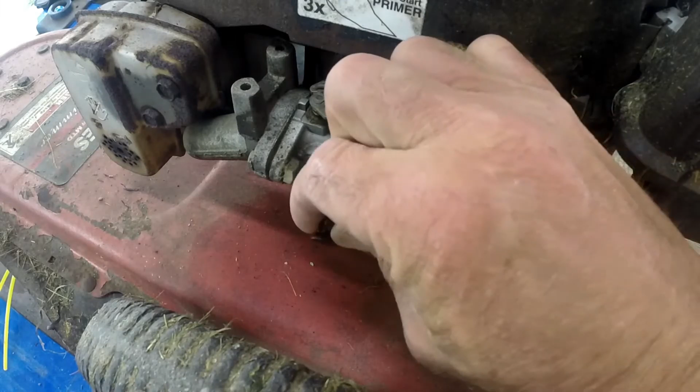In December 2008, the final Tecumseh engine rolled off the assembly line in New Holstein, Wisconsin, silently ending a 50-year reign over American driveways and winter storms. The factory simply went dark. Just a decade earlier, this engine was an unavoidable piece of American hardware.

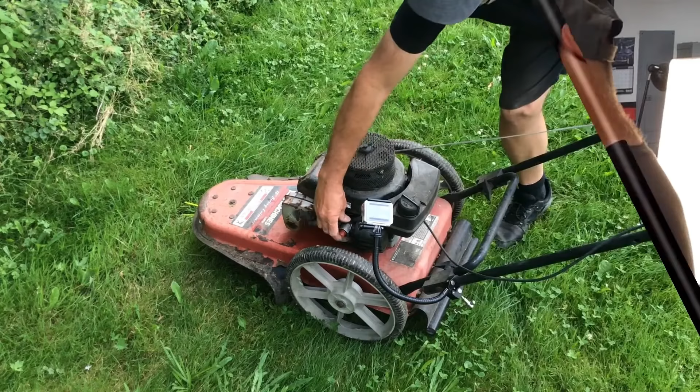Their legendary Snow King line held a near monopoly over winter, powering tens of millions of snowblowers from Toro to Sears Craftsman. The sudden shutdown sent a shockwave through a vast mechanical ecosystem. Local small engine repair shops, the businesses that kept American neighborhoods running, were left staring at empty parts bins. Homeowners suddenly realized their stubborn iron workhorses were now orphans.

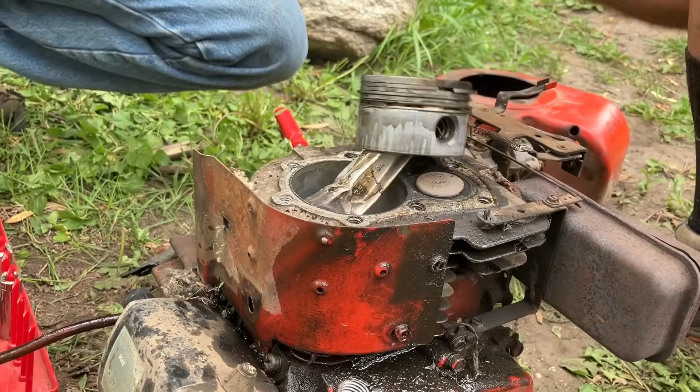The paradox is that the engines themselves had not failed. A Tecumseh flathead could still start on the third pull in sub-zero weather. But the American market no longer rewarded heavy, loud, repairable durability if it could not pass strict emissions rules or compete with cheap overseas clones.

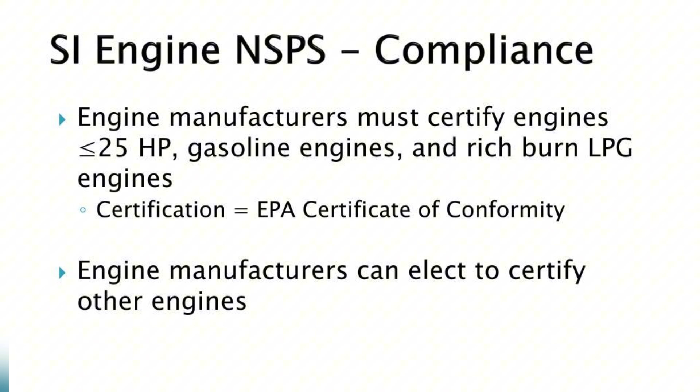But the real story of Tecumseh is not only about a bankrupt factory, it is the story of how the American suburb was built on a cheap, loud, repairable sound, and what happened when that sound became a liability.

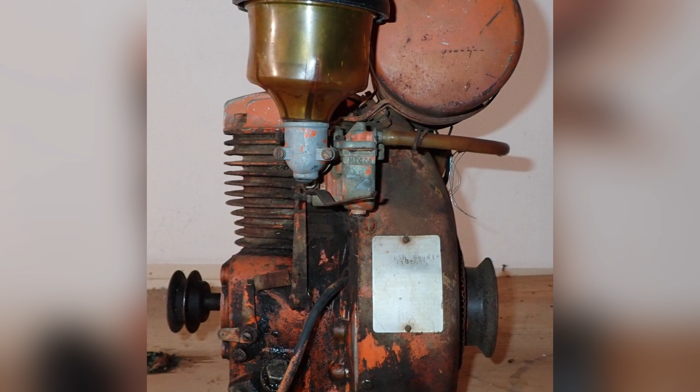When Tecumseh bought Lauson, they did not just buy a factory. They bought a ready-made engineering department, a workforce that understood combustion, and an immediate entry into the market. Tecumseh did not stop there. A year later, in 1957, they acquired Power Products in Grafton, Wisconsin, a company famous for its lightweight two-stroke engines.

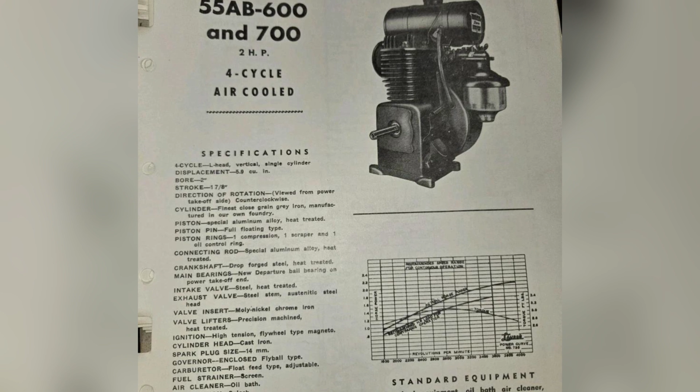An engine that completes a power cycle in 2 piston strokes, often making high power for its size but with emissions and oiling trade-offs. With Lauson providing 4-stroke engine reliability, an engine that completes intake, compression, power, and exhaust strokes across 4 piston movements, and Power Products offering 2-stroke speed, Tecumseh now owned the complete spectrum of light industrial power. These acquisitions were the first major strikes in what would become a 50-year war for the American garage.

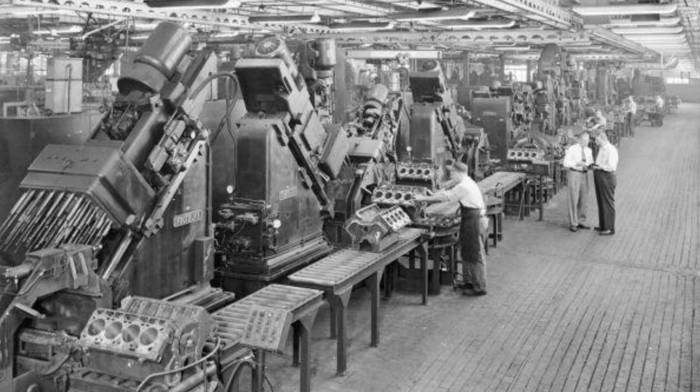Almost immediately, Tecumseh realized that the old way of building a small engine, a compact power unit used in lawnmowers, snowblowers, generators, and pumps, was too expensive for the modern consumer. Historically, farm and utility engines were built with a cast iron block, the main engine structure that holds the cylinders and major internal parts.

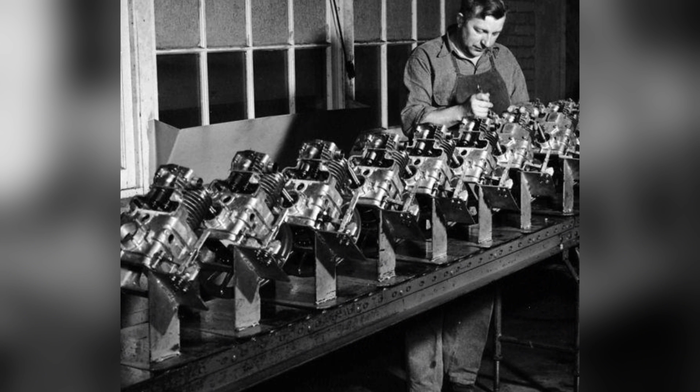Cast iron was incredibly strong and held heat well, but it was heavy, slow to machine, and expensive to ship. If a homeowner was going to buy a lawnmower at a local hardware store and push it across a quarter-acre lot every Saturday morning, the engine could not weigh 40 pounds on its own. It had to be light, and more importantly, it had to be cheap.

Tecumseh accelerated a massive industrial shift toward aluminum. By injecting molten aluminum into precise molds, the New Holstein factory could produce engine blocks at a staggering speed. Aluminum was lighter, dissipated heat faster, and cut the weight of a standard mower engine in half. More importantly, it slashed the manufacturing cost. This was not just an engineering victory, it was a retail breakthrough.

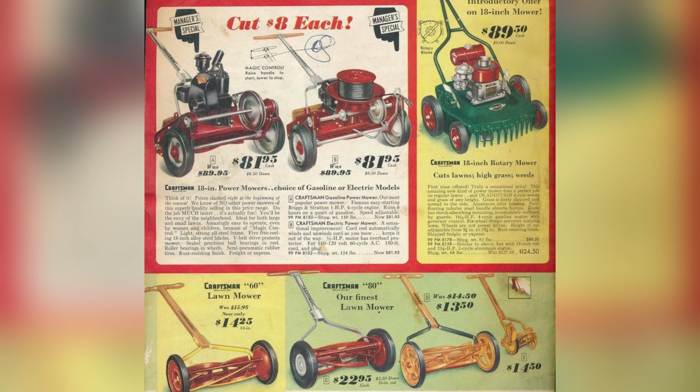In the late 1950s, engines reached Americans through systems. A company could build a great machine, but if it did not fit into the existing distribution network of hardware stores, catalog sales, and farm supply centers, it would fail. Tecumseh needed scale, and they found it in the Sears, Roebuck and Company catalog. By securing massive fleet orders from companies that built yard equipment for Sears, specifically the Craftsman line, Tecumseh guaranteed that their engines would be shipped to nearly every zip code in the country.

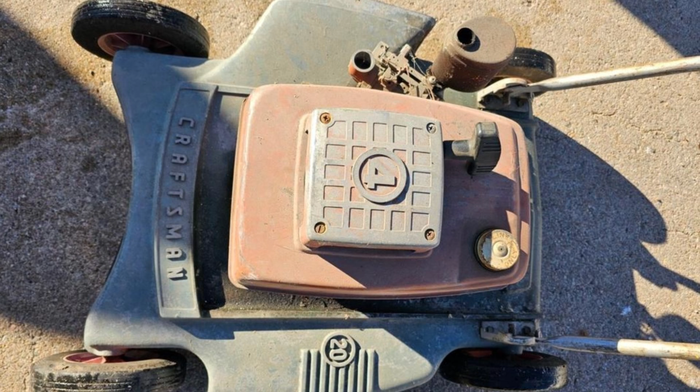A homeowner flipping through a catalog in 1959 did not have to understand the thermal properties of an aluminum block, nor did they care about the displacement, the total volume swept by the pistons inside the cylinders. They just saw a rotary lawnmower that cost less than a week's wages, ready to be picked up at the local Sears Auto Center.

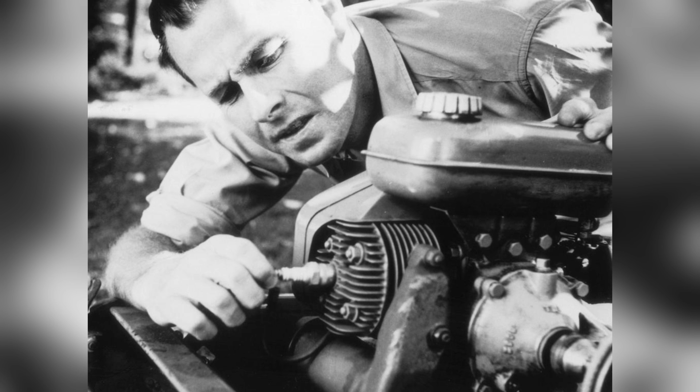The engine had become a household appliance, but unlike a refrigerator that sat silently in a kitchen, a small engine demanded a ritual. It required the smell of spilled gasoline on a driveway, the checking of the oil level, and the physical pull of a starter cord. The New Holstein factory was suddenly producing the mechanical heartbeat of the American weekend.

Tecumseh had the factories, the aluminum casting technology, and the distribution network. They had established a foothold against Briggs & Stratton, turning the small engine market into a two-horse race that would define American yard work for generations. The factory was ready, but to conquer the American yard, Tecumseh needed more than just a running engine. They needed a machine that could survive the absolute neglect of the American homeowner.

By the early 1960s, Tecumseh faced a mechanical problem that could not be solved by mass production alone. A lawnmower engine could not operate like a stationary generator or a heavy tractor. It had to be pushed up steep suburban embankments, tilted over curbs, and shoved under low-hanging branches. Early small engines often relied on gravity-fed fuel systems, meaning if the mower tilted too far, the fuel stopped flowing, and the engine simply died.

To conquer the uneven American yard, Tecumseh aggressively adopted and perfected the use of the diaphragm carburetor. A carburetor is a device that mixes fuel and air before the mixture enters the engine. But instead of relying purely on a float bowl and gravity, a diaphragm carburetor used a flexible rubber membrane that pulsed with the engine's vacuum, actively pumping fuel into the combustion chamber regardless of the engine's operating angle.

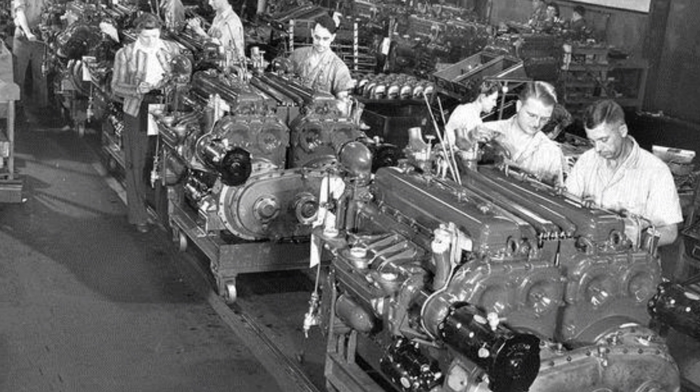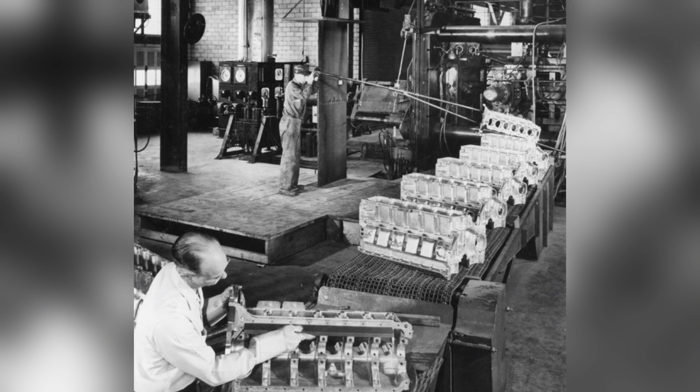This was not just a technical upgrade. In a practical American scene, it meant a homeowner in Pennsylvania could push a spinning lawnmower sideways across a 30-degree ditch without the engine sputtering out. Homeowners were no longer restricted to flat, perfectly manicured lawns. They could clear brush on steep, uneven terrain and maintain properties that previously required expensive professional landscaping equipment. The machine bent to the will of the landscape. Combined with a lightweight aluminum block, Tecumseh engines were now cheap to cast, easy to ship, and incredibly versatile.

Inside the New Holstein plant, the machining lines moved at a relentless pace. Thousands of aluminum blocks were cast, bored, and assembled daily. The scale of production drove the manufacturing cost down to a point where the engine was no longer a luxury item. It was a basic household utility.

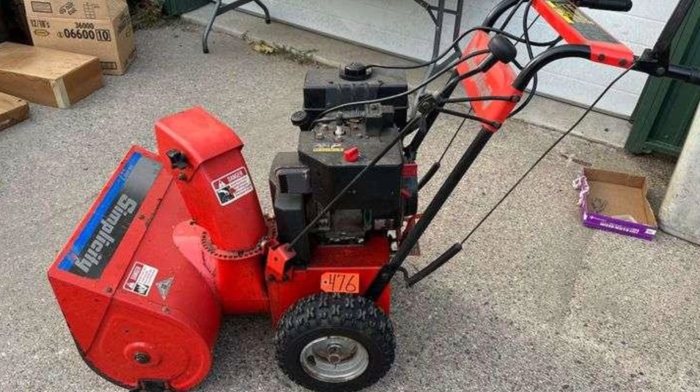But Briggs & Stratton had already saturated the summer grass market. To build an empire that could not be dismantled, Tecumseh had to claim a territory where their rival was vulnerable. They found it in the dead of winter. In 1962, Tecumseh launched a line of engines that would become the undisputed mechanical authority of the American snowbelt, the Snow King.

Building an engine to cut grass on a warm July morning was fundamentally different from building an engine to clear heavy, wet snow in January. Winter is violently hostile to internal combustion. Sub-zero temperatures thicken oil into sludge, shrink metal tolerances, and freeze condensation inside fuel lines.

A snowblower engine had to start when the homeowner was standing in a dark, freezing garage at 5 in the morning, wearing heavy gloves, pulling a frozen recoil cord before leaving for work. The Snow King succeeded because Tecumseh leaned heavily into the flathead design. A flathead is an engine design where the valves sit in the block rather than in the cylinder head.

By modern engineering standards, the flathead was wildly inefficient. The airflow pathway was convoluted, it ran hot, and it burned fuel poorly. But efficiency was not the metric of success in a February blizzard. Reliability was. The flathead design meant there were no delicate overhead push rods to bend or snap when a cold, oil-starved engine was violently forced into high RPMs.

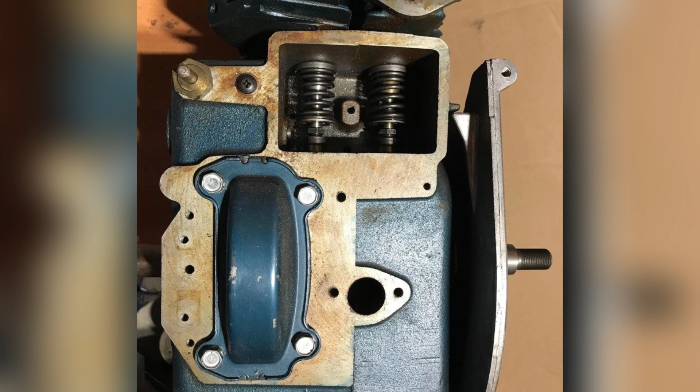It was a blunt, heavy-breathing iron and aluminum brute that could tolerate the absolute worst maintenance habits of the American homeowner. Tecumseh engineers modified the Snow King specifically for the cold. They added metal heater boxes around the carburetor to prevent icing. They redesigned the recoil starter with oversized handles so a user wearing thick winter mittens could firmly grip the pull cord.

They added aggressive rubber priming bulbs that allowed a frustrated homeowner to physically force raw gasoline directly into the intake tract for a cold start. When the engine fired, it barked to life with a harsh, unrefined clatter that echoed off snowbanks. A loud metallic rhythm that became the defining acoustic signature of a Midwestern winter.

By the late 1960s, the Snow King was not just a successful engine family, it was a monopoly. Tecumseh secured massive fleet contracts with the most trusted hardware names in America. If a homeowner went to a Sears retail store and bought a Craftsman snowblower, they were buying a Tecumseh block. If they bought an Ariens snow machine to clear a long Wisconsin driveway, it was powered by a Snow King. Toro, another titan of yard equipment, relied heavily on Tecumseh to power their winter machines.

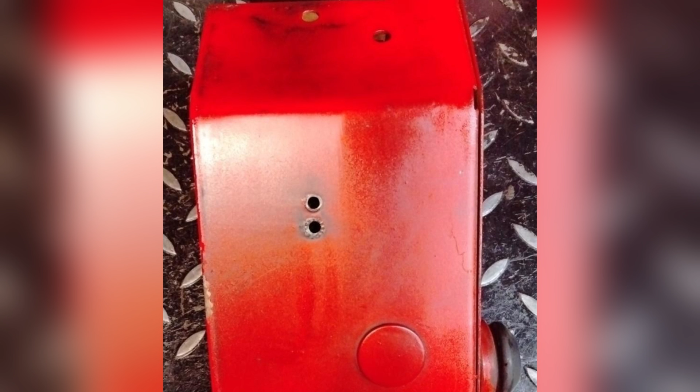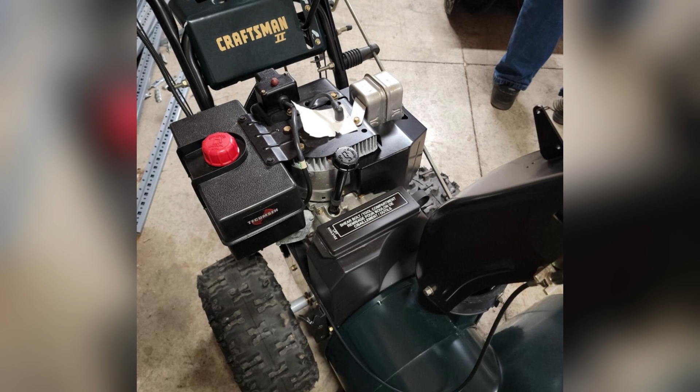This distribution network was the true breakthrough. Tecumseh did not have to sell engines directly to the public. They sold them to Sears, Toro, and Ariens, who then put them in every garage from Maine to the Dakotas. The engine was priced as a commodity. A homeowner did not need a bank loan to buy a 5-horsepower Snow King, horsepower being a measurement of how quickly an engine can do work. They simply bought the machine from a catalog, filled it with cheap gasoline, and expected it to run.

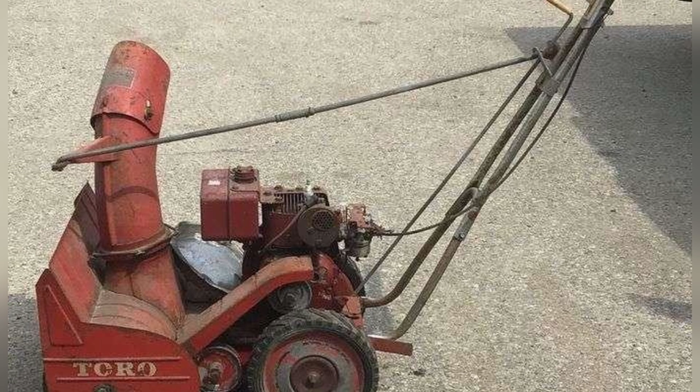But Tecumseh knew that even a cast-iron cylinder sleeve and a forged crankshaft, the rotating shaft that turns piston motion into rotational power, could not survive forever without service. The final pillar of their breakthrough was the establishment of a massive, decentralized service network. Tecumseh flooded the country with heavily detailed, oil-resistant service manuals and cheap replacement parts. They did not require specialized, high-end dealerships for repairs. Instead, they empowered the local small engine repair shop.

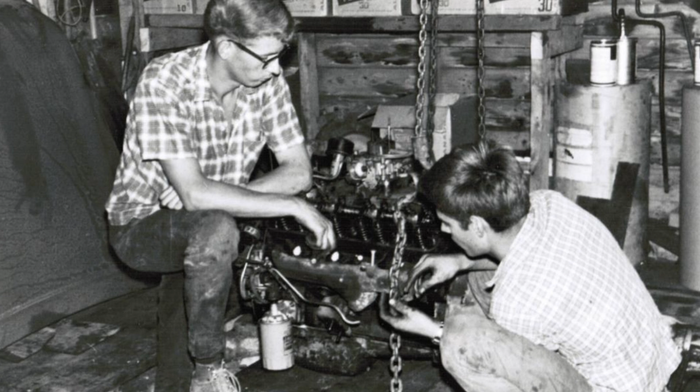In almost every American town, there was a cinder block garage filled with the smell of stale fuel and solvent, run by a mechanic who could rebuild a Tecumseh carburetor with his eyes closed. The parts network meant that an engine did not die when a gasket failed or a jet clogged. It was simply placed on a workbench, taken apart with basic hand tools, and put back into service before the next snowfall.

A homeowner could walk into a local hardware store, buy a $3 carburetor rebuild kit or a replacement spark plug, and fix the machine themselves on a Saturday afternoon. The local parts counter became the lifeline of the American yard. Tecumseh had created an engine that was cheap enough to mass produce, rugged enough to survive winter, and simple enough for a teenager to rebuild.

They had woven their machines into the fabric of suburban life, securing contracts that guaranteed millions of units sold every year. They had built the engine that could survive the cold, but they had not yet realized that they were building the mechanical identity of the American working class. By the 1970s, the Tecumseh Products Engine Division was no longer just a challenger to Briggs & Stratton.

It was an industrial empire running at maximum velocity. The New Holstein plant in Wisconsin had become a sprawling mechanical fortress of foundries, machining lines, and assembly bays. The air inside the factory smelled of hot aluminum, cutting fluid, and industrial exhaust. Thousands of workers stood at assembly lines, dropping forged crankshafts into aluminum blocks, torquing bolts, and bolting on the distinctive metal shrouds that would soon sit in millions of American garages.

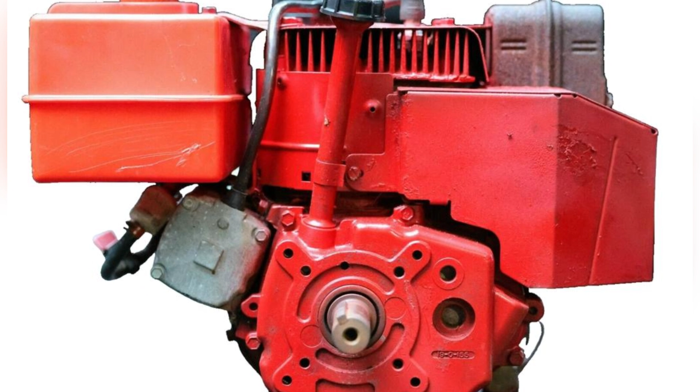Tecumseh had captured the American winter with the Snow King, securing contracts with Toro, Ariens, and Sears Craftsman. But an engine manufacturer could not survive on winter alone. The company needed to own the summer, and they needed to own the rapidly expanding market of suburban recreation. During the late 1960s and 1970s, the American backyard transformed. It was no longer just a place to cut grass. It was a place for go-karts, mini-bikes, and utility vehicles. Tecumseh seized this cultural shift by mass-producing engines that were perfectly suited for cheap recreational speed.

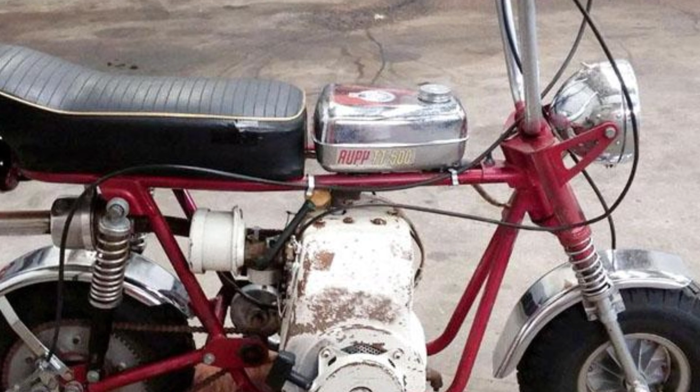The 5-horsepower Tecumseh Flathead became the undisputed mechanical heart of the American mini-bike craze. Companies like Rupp, Fox, and Alexander Reynolds built thousands of small, raw steel frames, but the machine was useless without a power source. The Tecumseh block was cheap, accessible, and easily modified. A teenager with a basic socket set could remove the governor, a mechanical device designed to limit the engine's maximum speed for safety, and suddenly a piece of lawn equipment became a neighborhood race car.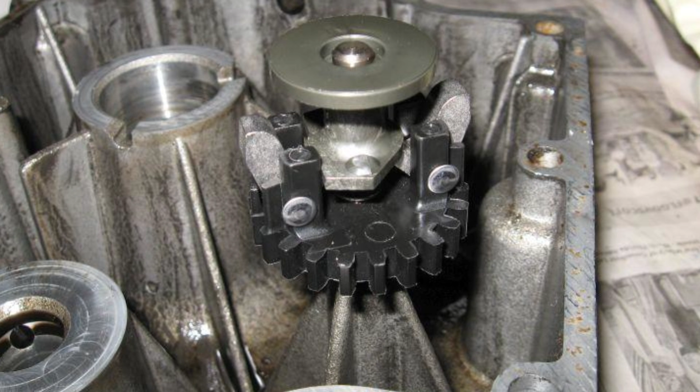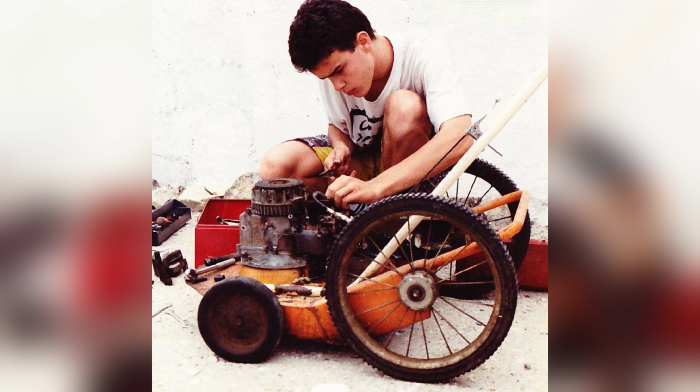This was not just a manufacturing victory, it was the moment Tecumseh trained an entire generation of Americans on how to turn a wrench, diagnose a flooded carburetor, and understand the relationship between fuel, spark, and speed. The reach of the Tecumseh empire in this era was staggering. Through massive fleet orders and catalog distribution, the engine was inescapable. If a homeowner walked into a Montgomery Ward, a J.C. Penney, or a local hardware store to buy a rotary mower, a tiller, a portable generator, or a trash pump, there was a massive statistical probability that the machine was powered by a Tecumseh block.

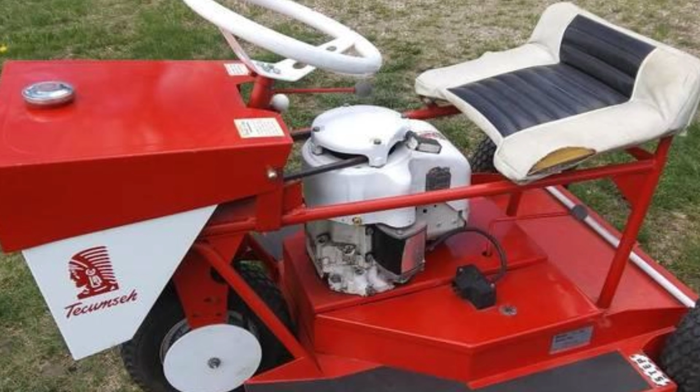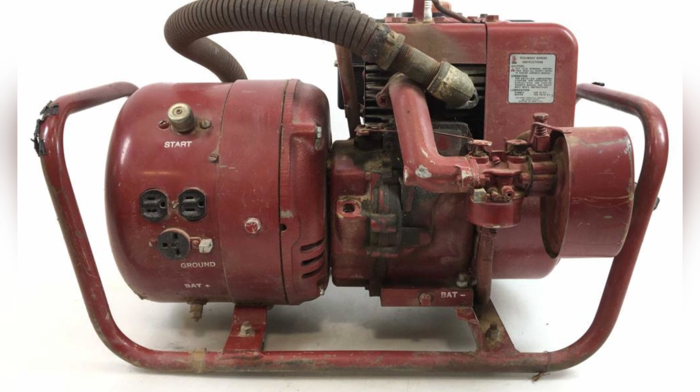They were turning out millions of engines a year, dominating the private label market. Sears did not cast its own engine blocks. They contracted Tecumseh to paint them black, slap a Craftsman decal on the starter shroud, and ship them across the country. The engine had become a utility as common as a light switch, but one that required physical interaction. In an America where a Saturday morning was measured by the smell of cut grass, and a winter storm was fought with iron and a pull cord, power was not a silent battery. It was gasoline, noise, and an engine that you could fix on a garage workbench. Power was a system, and Tecumseh had perfected the system.

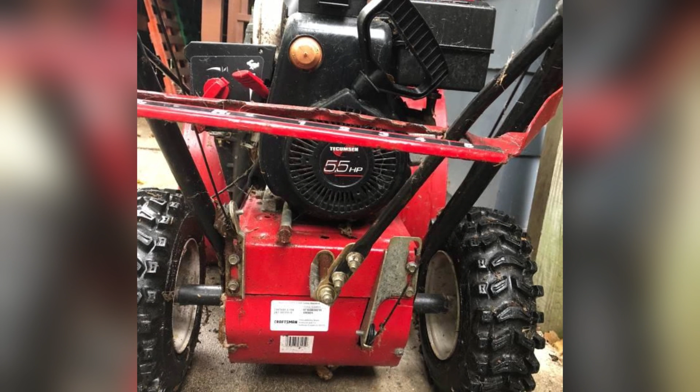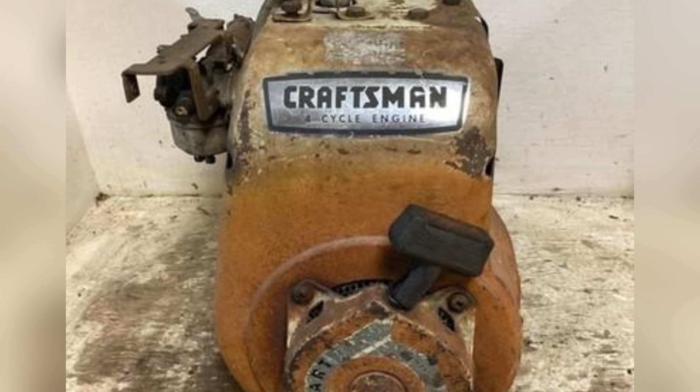By the 1980s, the service network was arguably more valuable than the engines themselves. The local small engine repair shop was a vital institution in the American suburb. These cinder block shops, often located behind hardware stores or tucked away in industrial parks, were filled with thousands of small cardboard boxes printed with the Tecumseh Indian head logo. Because the flathead design was fundamentally simple, a mechanic did not need a computer or a specialized diagnostic tool to keep a Tecumseh running. They needed a feeler gauge to set the ignition points, a wrench to clean the carburetor bowl, and a strong arm to test the pull cord. The engines were loud, they vibrated heavily, and they burned fuel with aggressive inefficiency, but they were deeply, inherently fixable.

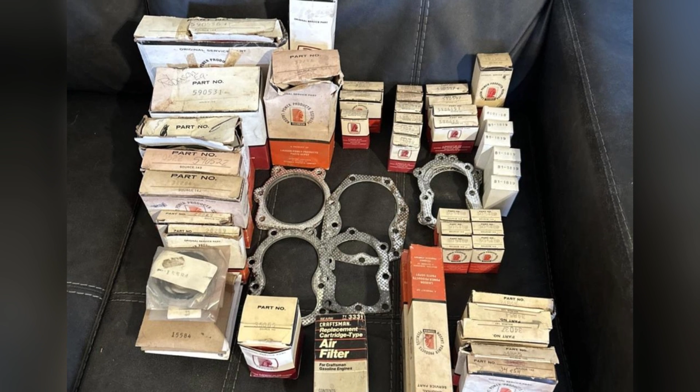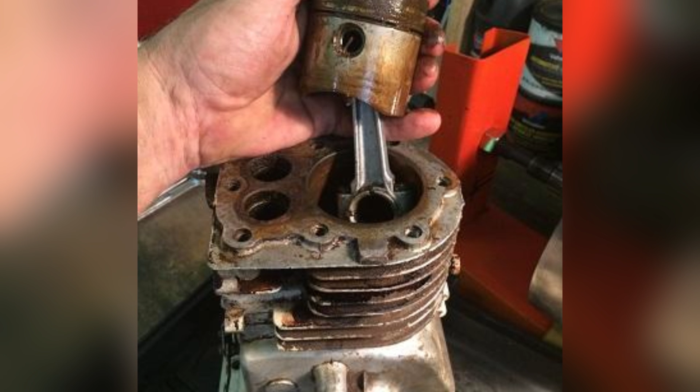This repairability was the foundation of the brand's trust. A homeowner did not throw away a Sears Craftsman snowblower when the engine stopped running. They dragged it to the local shop, paid $30 for a carburetor rebuild and a new spark plug, and kept using the machine for another 10 years. The engine was an investment in iron, supported by a parts catalog that seemed infinite.

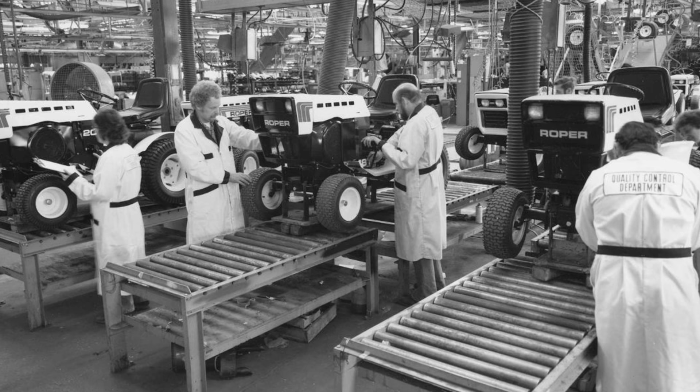By the 1980s and into the early 1990s, the Tecumseh engine division had reached a level of scale that made them a structural pillar of American yard work. They were no longer just supplying Sears and Toro. The American retail landscape was shifting toward massive big-box hardware stores, and the companies supplying those stores, massive metal stamping corporations like MTD and Murray, needed millions of engines to bolt onto their lawnmowers, tillers, and snowblowers. Tecumseh was ready to supply them. The factory lines in Wisconsin were operating at a staggering volume.

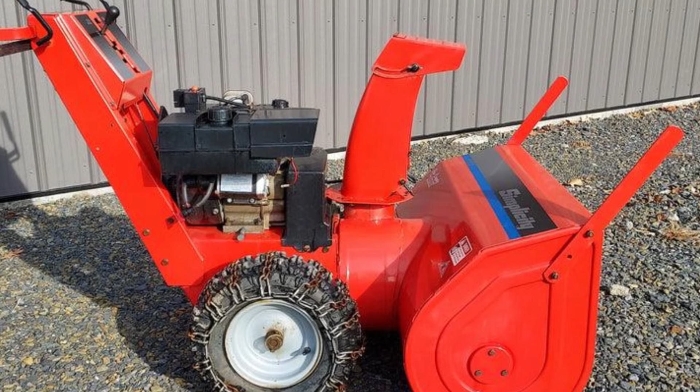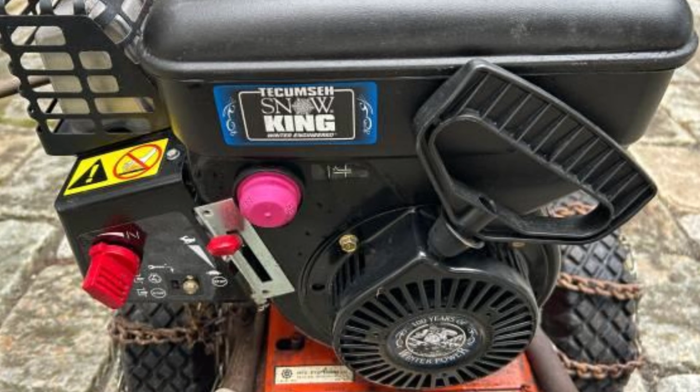The Snow King line in particular had evolved. It was no longer just the basic 3 or 5 horsepower block. As American driveways grew larger and consumers demanded wider, heavier 2-stage snowblowers, machines that used an auger to break the snow and a separate high-speed impeller to throw it, Tecumseh scaled up the displacement. They introduced massive, heavy-breathing flathead engines producing 8, 10, and eventually up to 13 horsepower.

These larger blocks were cast-iron sleeve brutes. They vibrated so violently that they often shook their own muffler bolts loose, but they generated immense torque, twisting force, often felt as the pulling strength of an engine. When a 10-horsepower Snow King hit a wall of frozen, compacted plow wash at the end of a driveway, it did not stall. The governor simply snapped the throttle wide open, the exhaust barked a deep mechanical roar, and the machine chewed through the ice.

This mechanical reliability created a cultural phenomenon. In the aftermath of the massive Midwestern blizzards of the 1980s and 1990s, an entire neighborhood could be mapped by sound. The harsh, unrefined clatter of Tecumseh flatheads echoed down every street. It was the sound of American homeowners reclaiming their driveways, relying on a machine they had bought out of a catalog 10 years earlier, and maintained themselves with a socket set.

The sheer volume of these engines in circulation created an economy of scale that seemed untouchable. The Tecumseh dealer network and independent service shops were supported by an ocean of replacement parts. At local hardware stores, pegboards were lined with blister-pack carburetor rebuild kits, float needles, spark plugs, and replacement primer bulbs. Because the engines changed so little from year to year, a mechanic did not have to stock hundreds of different, highly specific components. A handful of universal carburetors and gaskets could service a decade's worth of production.

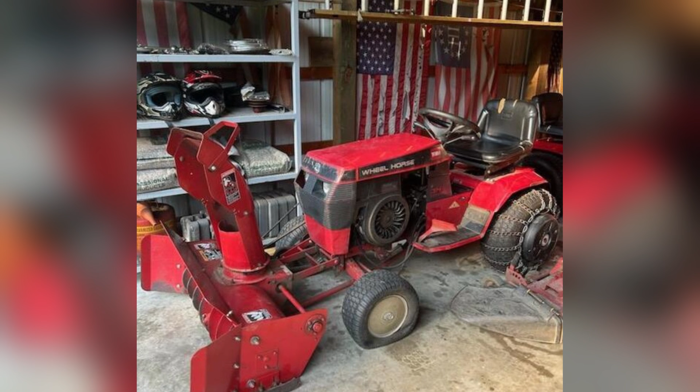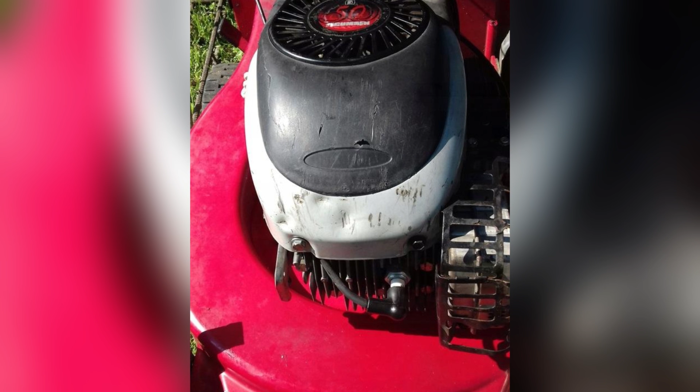This was the peak of the American pull-cord monopoly. The company had built a system where the machine was cheap enough for the average suburban homeowner to buy, yet durable enough to be repaired indefinitely by the local shop. It was a perfect equilibrium of manufacturing scale, fleet trust, and mechanical simplicity. The engine division was generating massive revenue for the parent company, and the name Tecumseh was stamped into the metal of millions of machines sitting in sheds, garages, and barns across the continent.

They had conquered the cold. They had conquered the American yard. They had built an industrial system that seemed completely immune to failure, supported by an army of mechanics and a public that accepted noise and vibration as the necessary cost of raw power. The era of the American pull-cord monopoly seemed permanent, but the first threat to the empire would not come from a competitor's factory. It would come from a rule book.

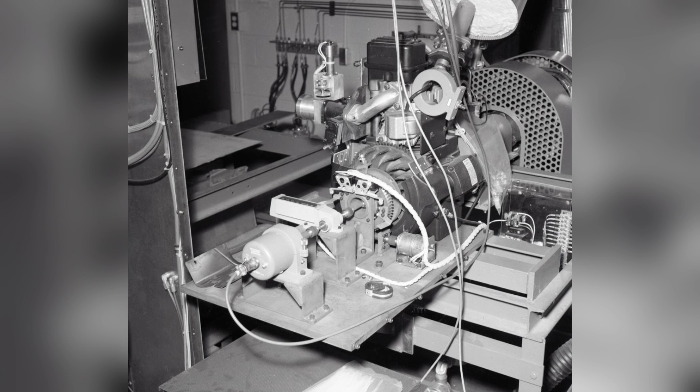The first crack in the empire was almost invisible to the American homeowner. It did not happen at a parts counter, and it did not happen on a factory floor in Wisconsin. It happened in a regulatory office in California in 1990. For decades, the Tecumseh engine division had relied on the blunt reliability of the flathead engine. But the flathead design contained a fatal flaw that had nothing to do with durability. Because the valves were located in the engine block alongside the piston, the combustion chamber was wide, irregular, and highly inefficient. The engine ran rich, meaning it constantly pulled in more fuel than it could completely burn.

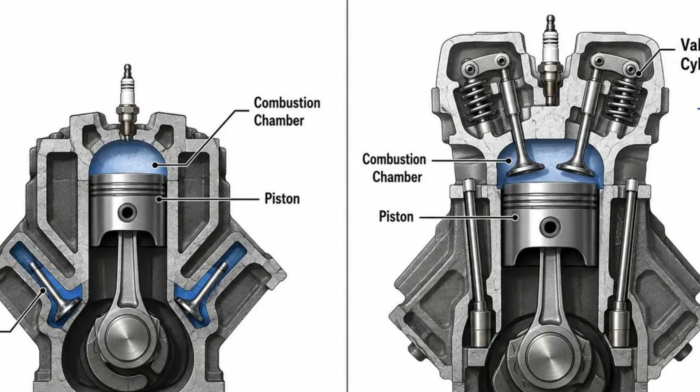Every time a homeowner pulled the recoil cord on a Saturday morning, the exhaust expelled a heavy cloud of unburned hydrocarbons. That smell of raw, unburned gasoline was the nostalgic scent of American yard work. But to environmental regulators, it was a massive, decentralized pollution crisis. In 1990, the California Air Resources Board, or CARB, announced that it would begin regulating emissions from small off-road engines. 5 years later, the Federal Environmental Protection Agency, the EPA, adopted Phase 1 emission standards for small utility engines across the entire country. This was the collision of Force 3, regulation, emissions, fuel economy, and certification, with a manufacturing system that had been optimized for cheap, dirty power.

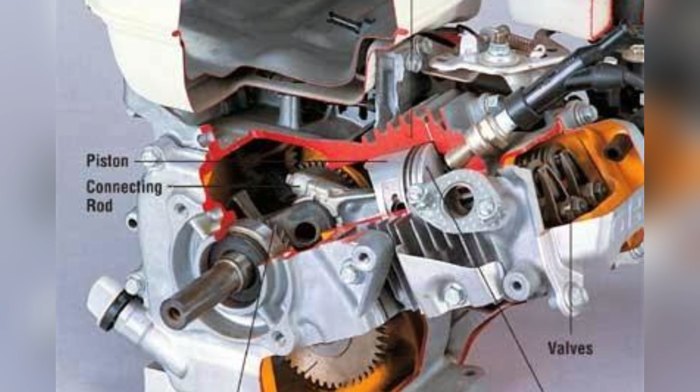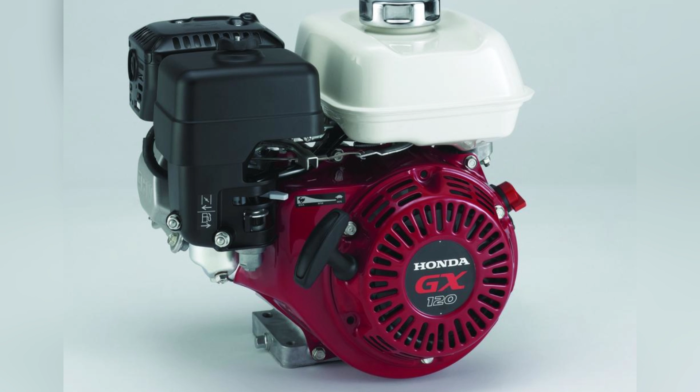Regulation does not make a story simple. It creates a new engineering problem. For Tecumseh, the problem was existential. The rules dictated that a small engine could no longer simply run. It had to run cleanly. To meet the new standards, the small engine industry had to abandon the flathead and move to the overhead valve design, or OHV.

An overhead valve engine, a design where the valves sit in the cylinder head directly above the combustion chamber, usually operated by push rods, allows fuel and air to flow more directly, burning cleaner, cooler, and with far greater efficiency. The Japanese manufacturer Honda had been quietly perfecting small OHV engines throughout the 1980s. When the new emissions rules took effect, Honda was already waiting.

Their GX series engines were a revelation. If a landscaper or a homeowner started a Honda OHV engine next to a Tecumseh flathead, the difference was jarring. The Honda was quiet. It did not shake the handles of the lawnmower. It did not smell like raw fuel. And most importantly, it easily passed the new emission standards.

Tecumseh suddenly found themselves trapped by their own scale. This was the brutal reality of Force 1: iron, aluminum, fuel, and manufacturing costs. The New Holstein plant was a sprawling, highly optimized machine built to cast, machine, and assemble flathead engine blocks by the millions at a rock-bottom price.

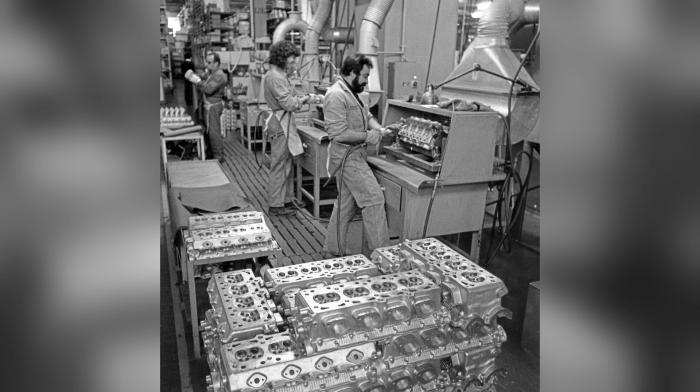To transition the entire product line to OHV meant completely retooling the foundries. It required new casting molds, new machining lines, new assembly procedures, and new training for a workforce that had spent 30 years building the exact same flathead architecture. It was a staggering financial burden.

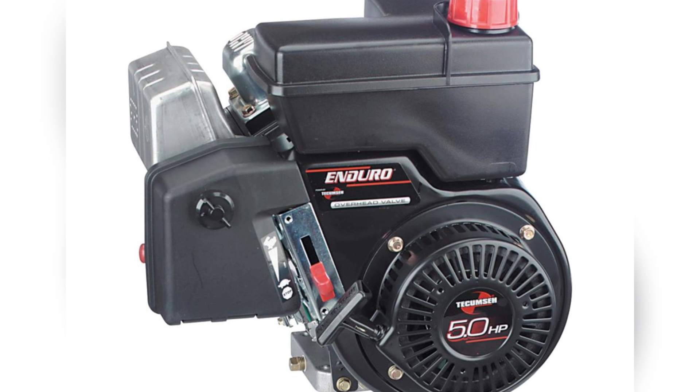Tecumseh attempted to adapt, introducing their own OHV lines like the Enduro series. But engineering an OHV engine on a strict budget was difficult, and early Tecumseh OHV models struggled to match the smooth, bulletproof reputation that Honda was establishing in the premium market. The market began to fracture.

Commercial landscapers, fleet managers, and premium equipment brands started migrating toward Honda or paying a premium for upgraded Briggs & Stratton OHV engines. A landscaping crew running a commercial walk-behind mower for 8 hours a day could not afford the vibration, the fuel consumption, or the noise of the old flathead. They gladly paid more for a quiet, fuel-efficient machine.

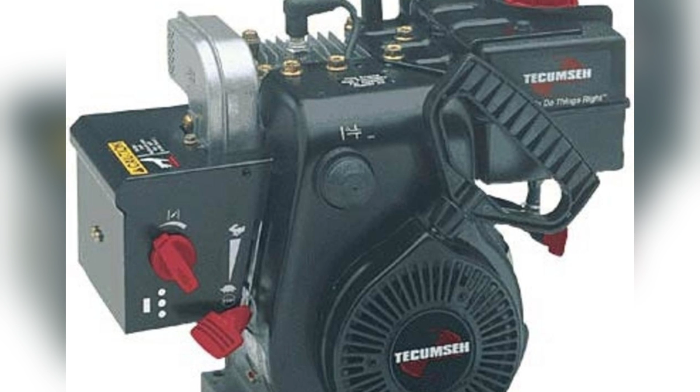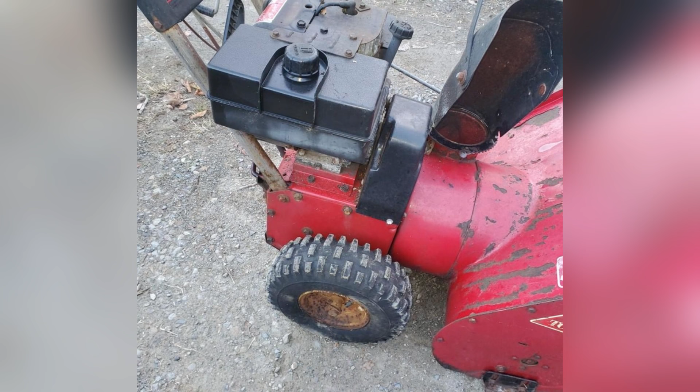Tecumseh's grip on the premium summer market began to slip, but they still had winter. The Snow King line remained a massive revenue generator because, in a February blizzard, homeowners did not care about engine noise or smooth idling. They cared that the machine started. Toro, Ariens, and Sears Craftsman continued to buy millions of Snow King engines, providing a financial safety net for the engine division. But even the winter monopoly was no longer safe.

The EPA Phase 2 emissions standards were looming, tightening the noose on the flathead design even further. Every year it cost Tecumseh more money in research, development, and carburetor modifications just to keep their legacy engines legally compliant. The profit margin on a 30-year-old engine architecture was shrinking rapidly.

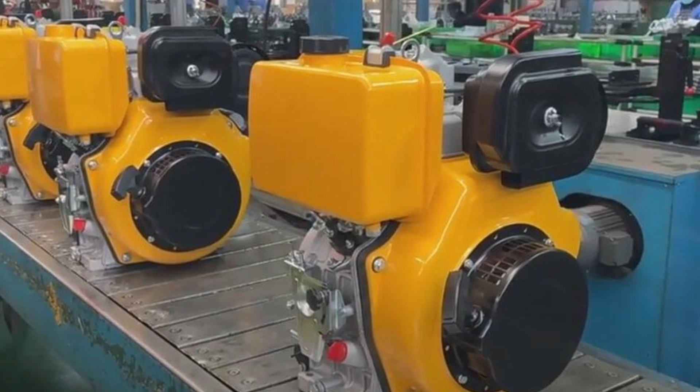The machine was still running. The service network was still intact. A homeowner could still walk into a local repair shop and buy a carburetor rebuild kit for $3. But the underlying economics of the American pull-cord monopoly had fundamentally changed. The brand had survived the first wave of regulation, but they had spent massive amounts of capital doing it.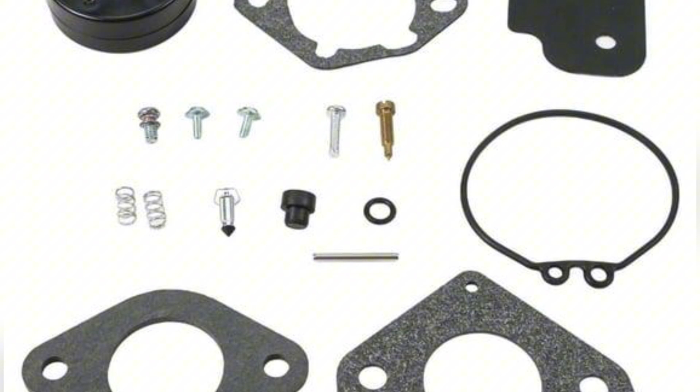The factory was burdened, the parent company was growing restless, and the next rival was already waiting, not with a better engine, but with a cheaper one. While regulation forced the engine to change, the final blow would come from an entirely different direction, bringing a flood of foreign iron that would make the very concept of American repair obsolete.

By the early 2000s, the small engine market was experiencing a massive structural shift. The traditional American hardware store and the beloved Sears catalog were being rapidly replaced by massive, big-box home improvement retailers. Companies like Home Depot and Lowe's demanded absolute cost control from equipment manufacturers like MTD, Murray, and Husqvarna. Every component on a lawnmower or a snowblower was scrutinized for cost, and the engine was the most expensive line item. At this exact moment, overseas manufacturers began producing millions of inexpensive overhead valve engines.

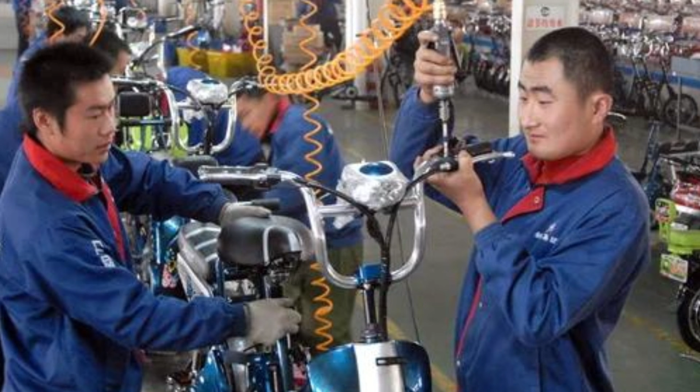These were the clones, unlicensed or heavily derivative overseas copies of established engine architectures, most often based on the highly successful Honda OHV design. Because these engines were manufactured in massive, state-of-the-art facilities in China, without the legacy costs of older American plants, they could be sold to equipment makers for a fraction of the price of a Tecumseh.

This was the brutal reality of Force 1: iron, aluminum, fuel, and manufacturing costs. An American factory in New Holstein, paying Midwestern wages and operating aging foundries built for flathead engines, simply could not build a compliant, clean-running OHV engine cheaper than an overseas factory could build a clone. The math no longer worked.

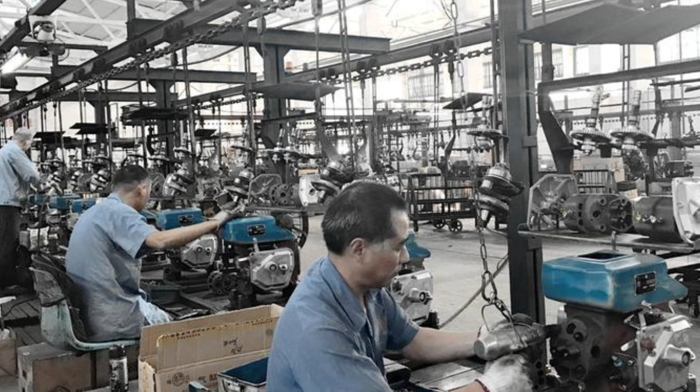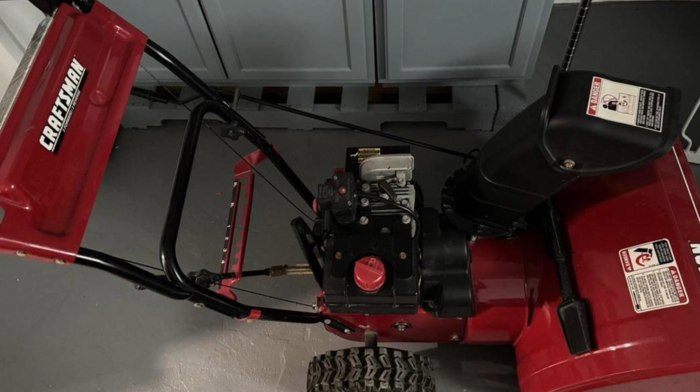If a big box retailer demanded that a new snowblower retail for under $400, the equipment manufacturer had no loyalty to the Tecumseh Indian head logo. They bought the cheaper engine. The massive fleet orders that had sustained the Wisconsin plant for decades began to evaporate. Even Sears Craftsman, the long-standing fortress of the Snow King, began looking at alternative power plants to keep their entry-level models competitively priced. The pressure began to tear the company apart from the inside.

The parent organization, Tecumseh Products Company, was still primarily a global titan of refrigeration compressors. For decades, the engine division had been a highly profitable counterpart, but by the mid-2000s, it had become a financial anchor. It was bleeding cash, struggling with warranty claims on transitional engine designs, and failing to regain the market share it had lost to Honda and the clones. Corporate patience finally ran out.

In 2007, the parent company made the decision to amputate. They sold the entire engine manufacturing division to Platinum Equity, a private equity firm. The operation was rebranded as Tecumseh Power, stripped of its connection to the refrigeration giant, and expected to survive on its own in a market that was actively rejecting its core products. It was a classic example of Force 6: corporate consolidation, acquisition, and brand survival. The badge remained on the starter shrouds, but the industrial backing that had given the engine its strength was gone. The company was now operating on borrowed time.

When the global financial crisis struck in 2008, consumer spending on yard equipment plummeted. American homeowners stopped buying new snowblowers and lawnmowers, choosing instead to stretch the life of their old machines. For a highly leveraged private equity acquisition, a sudden drop in sales volume was fatal. The numbers simply could not be justified.

In December 2008, with almost no warning to the public, the plug was pulled. The New Holstein plant was shut down. The assembly line stopped moving. The molten aluminum cooled in the foundries. A company that had spent 50 years building the mechanical heartbeat of the American suburb simply ceased production.

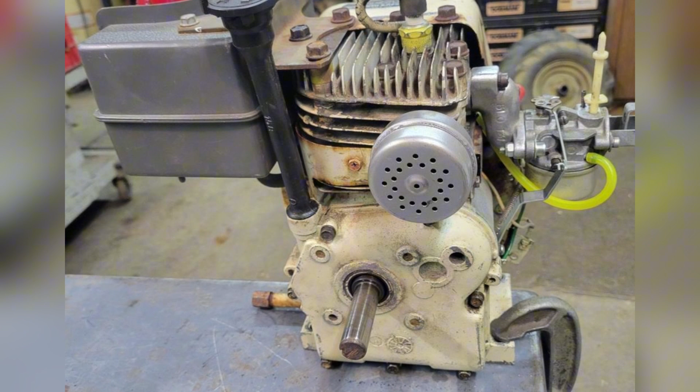The collapse sent an immediate, paralyzing shockwave through Force 2: dealers, fleets, farmers, pilots, and service networks. Tecumseh had not just built engines, they had built an entire ecosystem of repair. Across the snowbelt, thousands of local small engine mechanics woke up to find that their primary supplier no longer existed.

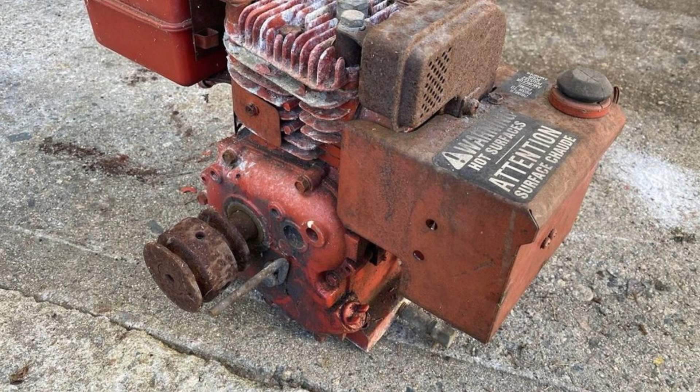Imagine a cinder block repair shop in Michigan in January 2009. A customer drags in an 8-horsepower Snow King that will not start. The mechanic diagnoses a cracked carburetor bowl and a blown head gasket. They go to their parts catalog, call their regional distributor, and are met with a terrifying reality. The parts are on indefinite backorder. There is no factory to cast the aluminum. There is no warehouse to ship the gasket.

The vast, decentralized repair network that had made Tecumseh legendary was suddenly starving. Mechanics had to scavenge junkyards and strip dead engines just to keep customer machines running. The American habit of repairing a broken yard machine was suddenly disrupted by the sheer impossibility of finding factory-supported iron.

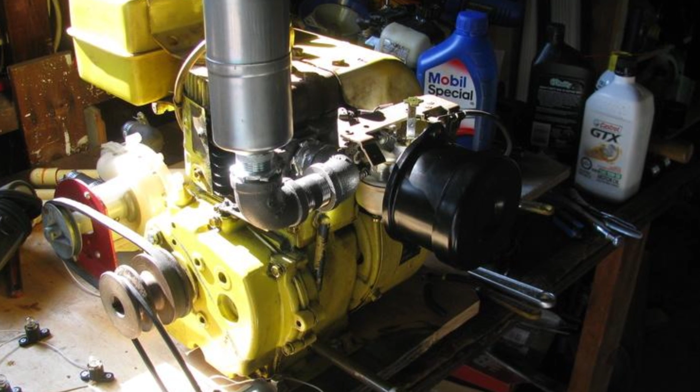The engine still ran. The big box stores demanded lower prices. The foreign clones arrived. The emissions rules tightened. The parent company walked away. The private equity firm pulled the plug. The parts network collapsed. The factory lines went dark. The sound faded. The badge remained. The world it powered was gone. The machines were left without a maker. But in barns, sheds, and garages across the snowbelt, the engines refused to die.

The death of the New Holstein factory in 2008 was supposed to be the absolute end. But an engine empire built on tens of millions of cast iron and aluminum blocks does not vanish just because a private equity firm files for bankruptcy. The machines were too deeply embedded in the American landscape to simply disappear.

In 2009, something highly unusual happened in the aftermath of the collapse. Certified Parts Corporation, or CPC, a company based in Janesville, Wisconsin, stepped into the wreckage. They did not buy the company to build new engines, and they could not restart the massive foundries.

Instead, they bought the intellectual property, the engineering blueprints, and the remaining tooling specifically to keep the existing machines on life support. CPC knew that across the American snowbelt, there was still a massive, desperate demand for carburetors, gaskets, and recoil starters. The brand survived, but it survived entirely as a parts supplier for a ghost fleet.

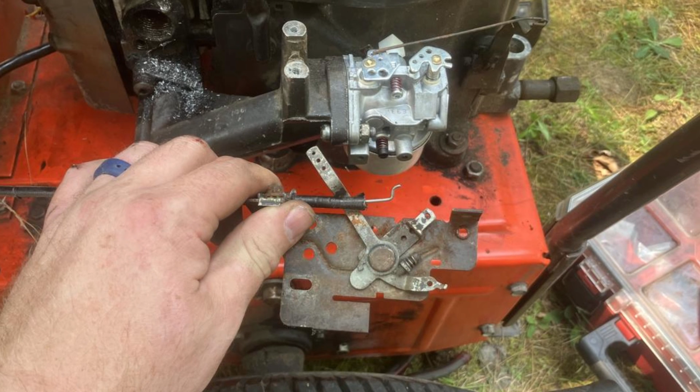Today, original Tecumseh parts are prized commodities. Mechanics became scavengers, hunting through old dealership inventories and relying on aftermarket copies just to keep the remaining machines running. The name Tecumseh no longer exists on new hardware store shelves, having been entirely replaced by foreign clones and modern overhead valve engines. But it thrives in an entirely different American ecosystem.

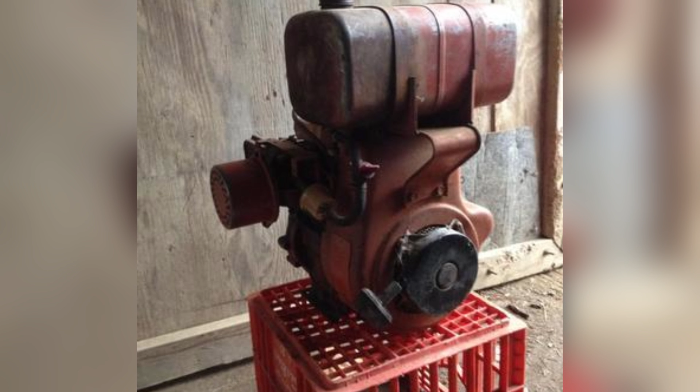If you walk into a vintage engine show, a Midwestern swap meet, or scroll through rural estate sale listings, you will find the flatheads. There is a massive subculture of mini bike and go-kart restorers who actively hunt for original 5-horsepower Tecumseh blocks. For these builders, a modern Honda clone is too quiet, too smooth, and entirely devoid of character. They want the harsh, raw, unrefined mechanical clatter that defined American childhoods in the 1970s.

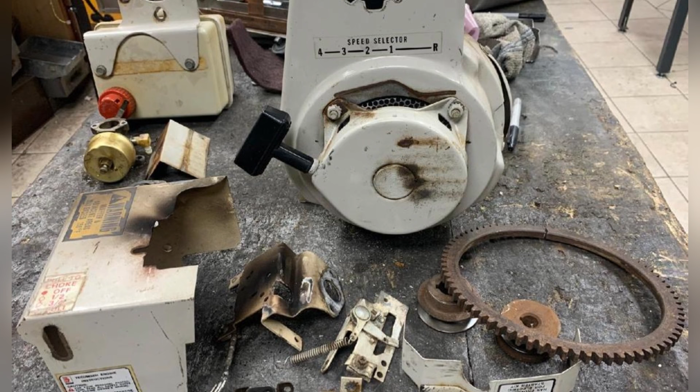They trade rusted engine shrouds bearing the old Indian head logo, debate carburetor jetting, and painstakingly rebuild blocks that were originally designed to be nothing more than cheap, disposable utilities. And across the Rust Belt, the winter monopoly still holds out in isolated pockets. Stubborn homeowners still drag 30-year-old Sears, Craftsman, and Ariens snowblowers out of their garages every winter. They prime the stiff rubber bulbs, choke the carburetors, and rely on the exact same cast iron cylinder sleeve that cleared the massive blizzards of the 1980s and 1990s.

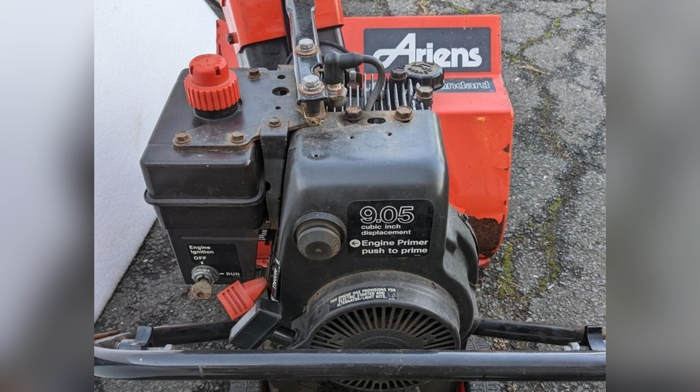This is not nostalgia. It is not just a generation of older Americans missing a loud sound on a Saturday morning. A surviving Tecumseh engine sitting on a garage workbench is a physical argument about how the country used to understand machinery. We have entered the era of electrification, the massive shift from fuel-burning mechanical power toward electric motors, sealed lithium-ion batteries, and software-controlled systems.

Today, if a battery-powered snowblower or lawnmower fails, the homeowner does not take a wrench to a carburetor bowl. They check a warranty code, wait for a replacement, or throw the plastic unit away. The user is entirely locked out of the machine. An old Tecumseh flathead represents the exact opposite. It proves that American yard work used to involve a physical-mechanical relationship. The homeowner had agency over the equipment.

If the engine broke, you walked to the local parts counter, bought a $3 float needle, learned how to set a spark plug gap, and fixed it yourself. The noise, the heavy vibration, and the smell of spilled gasoline were the acceptable, tangible costs of mechanical independence. It was a time when repair belonged to the people, not to the manufacturer. That independence is no longer mass-produced.

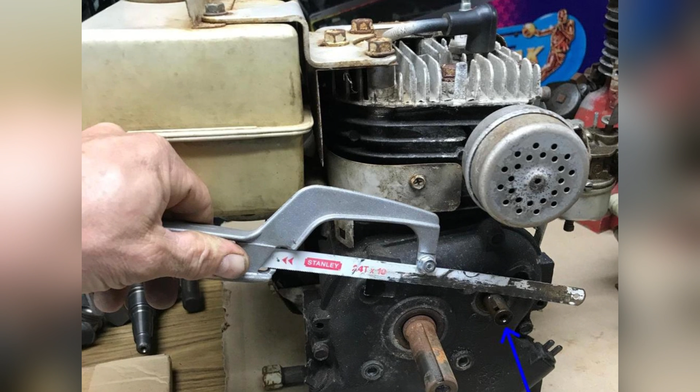If you travel to New Holstein, Wisconsin, today, the physical footprint of the massive factory complex still exists, but the foundries are silent. The town that was once defined by the relentless rhythm of aluminum casting, machining lines, and factory labor had to find a new identity after the engine division collapsed. The parent company, Tecumseh Products, eventually relocated its refrigeration compressor business, survived through various corporate reorganizations, and left the small engine legacy behind entirely as a closed chapter of industrial history.

The name survives now as a historical warning. It is a testament to what happens when an industrial empire optimizes perfectly for cheap, reliable power, but fails to anticipate the brutal, combined forces of environmental regulation and foreign manufacturing scale. America did not stop needing to clear its driveways or cut its grass. It simply stopped needing that kind of power. The market decided that quiet, clean, and disposable was more valuable than loud, dirty, and infinitely repairable.

The old service network collapsed. The cinder block repair shops closed their doors. The mechanical heartbeat of the American suburb was permanently silenced by the rulebook and the battery. Yet the old iron refuses to vanish completely.

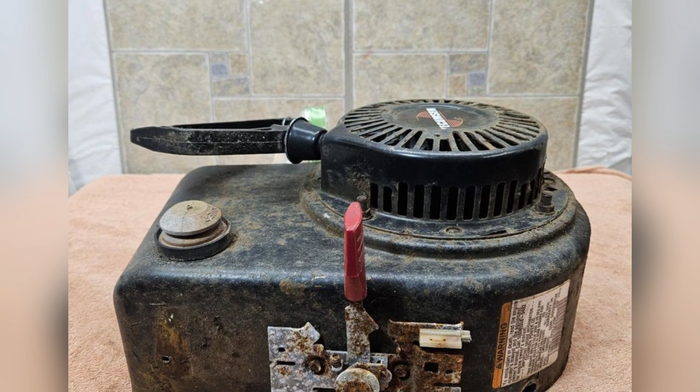Somewhere in a Midwestern garage, pushed behind a wall of modern, silent plastic tools, an old Toro snowblower still sits in the cold. The red paint on the Tecumseh engine shroud is faded, the steel gas cap is scratched, and the primer bulb is cracked from age. But the pull cord is still stiff, the block is still solid, and it is waiting for a February morning that no longer sounds the same.